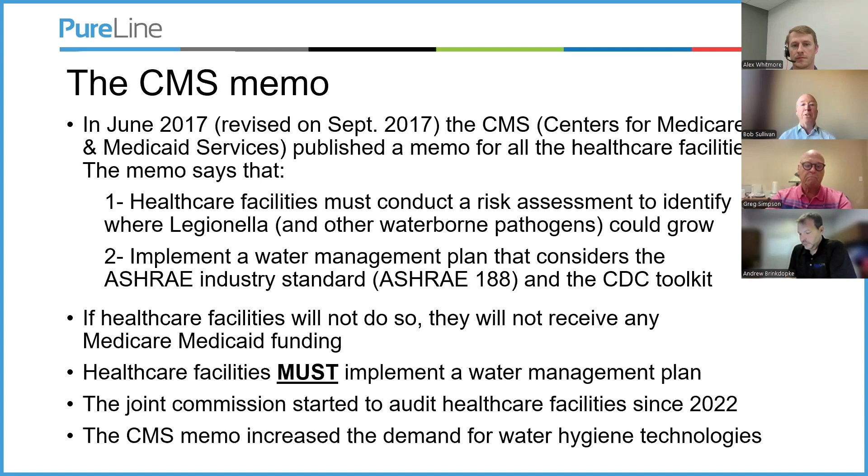So let's talk about the supplemental disinfection technologies. What's available to you and what are we going to address today? So there's really three that are only EPA listed disinfectants for potable water.

And please note that we're kind of focusing on that EPA listed disinfectants. You have chlorine, you have chlorine dioxide, and you have monochloramines. We're going to spend a lot of our time talking about chlorine dioxide and monochloramines, not so much chlorine. Your water, most of you on here, probably get water that is chlorinated from the city. Okay, it comes to you that way. We're also very aware that even though it comes to you this way, that still doesn't protect you against Legionella. So that's why the focus is going to be on the chlorine dioxide and monochloramines.

There are some other technologies, okay? These are non-EPA listed disinfectants. That's copper silver, some of you may be using it, ozone, and then there's a mixed oxidant system out there, which is, in my mind, really a sodium hypochlorite generator. So you're putting bleach in the system. We're not going to spend a lot of time on these. If you have questions, we certainly have information. But they are non-EPA listed disinfectants for potable water.

And so we really wanted to focus on, kind of the game here. So monochloramine chemistry is usually produced on site as needed. There's no storage or highly concentrated monochloramine solution. Precursors are, as you might be aware, sodium hypochlorite and ammonium chloride or sulfate. And it's important to maintain this ratio.

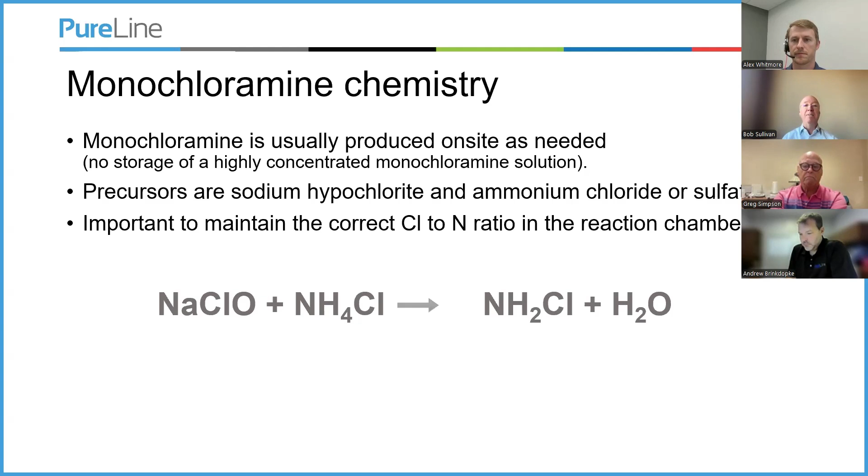What is chlorine dioxide? It's a selective oxidant. It's kind of this yellow-green liquid ultimately. And when I say yellow-green liquid, that's probably from your perspective.

From the chemistry of this product, it's really a dissolved gas. So imagine that I just leave a cup of chlorine dioxide on my desk. That gas, it'll be liquid, it'll be that green yellow initially, but that gas will slowly try to escape. As it escapes, the yellow green will reduce in its color. And so what I'm trying to identify is just the basics of it. It is one chlorine atom and two oxygen atoms.

If you get down to looking at the little symbols off to the side here, again, dilute, liquid, aqueous, and gaseous solution. It's easier for me to think about it as a dissolved gas.

It's used in a wide variety of applications. The biggest one in the country is it makes sure that your paper is white. But more importantly, to what we do at PureLine, it is used in a variety of industries such as water treatment, food safety. A lot of food plants around the country depend on it to clean the water, so they can make anything from yogurt to cheese, etc. The oil and gas guys use it to clean up the water that has to go down an oil well.

And healthcare. We've been in healthcare for 30 years doing this. So it's been around a long time.

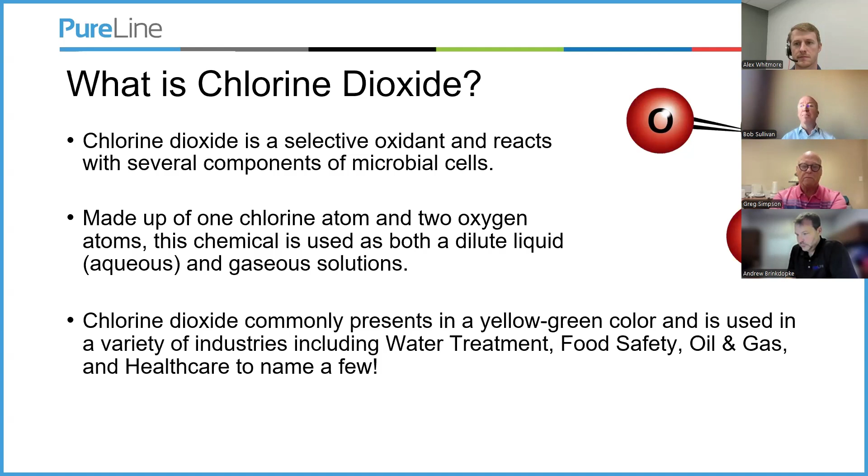So our background, this is a chart. It kind of gets into some of the strength of chlorine dioxide and what it can do. The table that you see that talks about oxidation strength compares different types of oxidants to chlorine dioxide. And what I want you to take away is this: chlorine dioxide has, compared to the others, a lower oxidation strength. And why is that important?

Because it prevents the corrosion. You get into some of these and you're going to get higher corrosion. They're not good for your pipes. Forget about the safety of potable water, but I'm just comparing these oxidants.

But it is a very strong, effective, selective oxidant. What does selective mean? That means that it really wants to go after things it wants to destroy. If you put chlorine or sodium hypo into your line, it's going to want to chlorinate everything. Chlorine dioxide is not going to do that. It's hungry for things that are causing you issues, the biofilms, the bacterias, etc.

The primary reaction is a free radical reaction and is independent of pH. Now, not so important for hospitals, but we have other applications where the pH goes high. If the pH goes high, you have to use more and more chlorine, sodium hypo, any of the chloramine products, etc. This independence on pH becomes a very, very big advantage for chlorine dioxide.

I've already discussed that it's a dissolved gas, and it's probably the best thing in this whole list that we can talk about for penetrating biofilms. It is less corrosive, I pointed that out in the oxidation strength. And the final product, which is what the EPA and your FDA guys like, eventually returns to just chloride and oxygen, which means chlorine dioxide can be registered as organic.

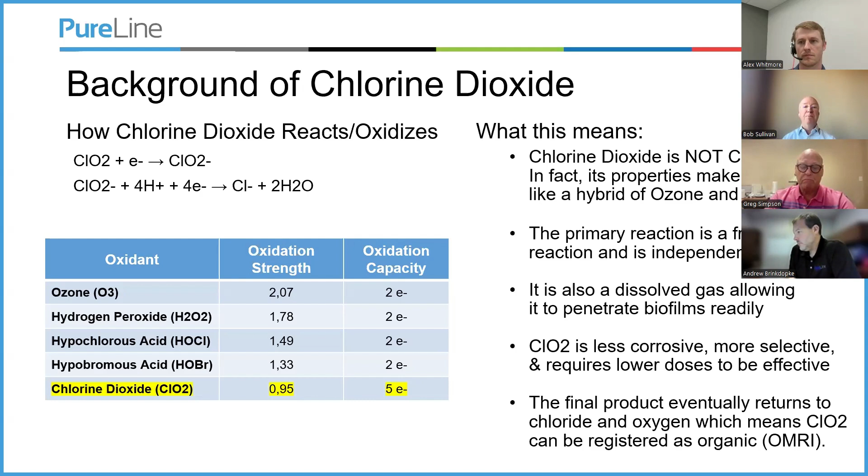As Alex mentioned, a couple of months ago we did a paper at AWT, Association of Water Technologies, and the paper compared chlorine dioxide and monochloramine and their effectiveness in a large number of categories. This was a review article, and it's what the science says, it's what the literature says about these. It wasn't opinion, it wasn't my opinion anyway, it was the opinion of a lot of other writers.

The first category was the relative speed and efficacy of disinfection. Chlorine dioxide kills, inactivates bacteria very rapidly, second only to ozone in terms of its kinetics of disinfection, compared to monochloramine, which is much, much slower.

One of the references cited in the article was these people compared monochloramine's action with that of non-oxidizing biocides in terms of how long it took to kill things. So monochloramine acts like a bacterial poison. Chlorine dioxide acts like something that causes a heart attack. That's the difference in the way of thinking of the speed and efficacy. The second area was biofilm penetration and removal.

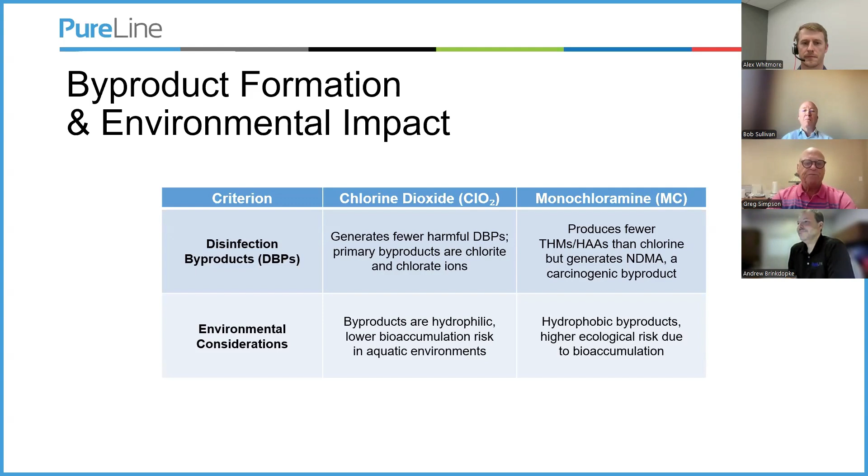In terms of corrosion, a lot of work has been done with respect to corrosion and chlorine dioxide, and it certainly depends on how the chlorine dioxide is made. We did a paper not too long ago about work in the oil patch, where we used fairly high levels of chlorine dioxide compared to what's used in potable water. In every system we treated, with the exception of just one or two, and even those were within experimental error since the corrosion was low to begin with so it didn't matter, the corrosion rate went down. That is, the natural corrosivity of the water was such that when you fed chlorine dioxide, the corrosion rate after treatment was lower than it was before treatment. Of course, that's in the oil patch.

Chlorine dioxide is aggressive to certain plastics, so we are very careful about our material choices when making a chlorine dioxide generator, where you have thousands of parts per million of chlorine dioxide. But in terms of its corrosivity at the use concentrations applied in potable water, it will not be corrosive. Monochloramine is also pretty good in this regard, but if you've ever had a drinking water system that used monochloramine, your toilet flaps don't last very long, because monochloramine degrades them a lot faster than chlorine does.

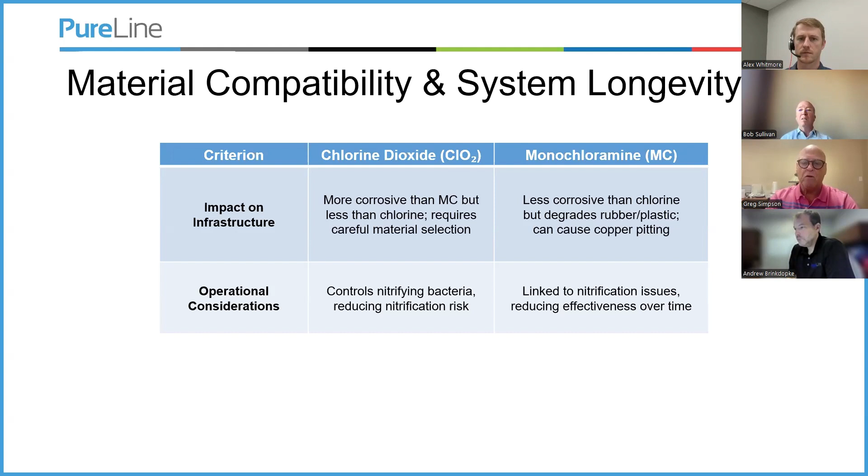Greg is obviously incredibly versed in the chemistry and the science behind chlorine dioxide. My forte is in how to make systems and design applications for real world use, to make them safe, reliable, controllable, those types of things.

We participate in all sorts of water applications throughout the country, and chlorine dioxide is used anywhere from municipal water, to be the primary treatment of the water before it makes it to the hospitals, secondary treatment of that water within hospitals and food plants and nursing homes to keep those water systems clean, well water treatments for metals removal, as well as treatment and disinfection of E. coli and other waterborne pathogens.

Wastewater treatment, cooling towers, and we do this at hospitals and nursing homes as well, cooling towers to prevent biofilm accumulation, which will degrade its effectiveness, as well as control Legionella, which, if you've seen in the papers, cooling towers, when they become infected with that, can then spread that Legionella via water droplets to those that are near the system and cause infection that way, as well as used in CIPs and wash waters.

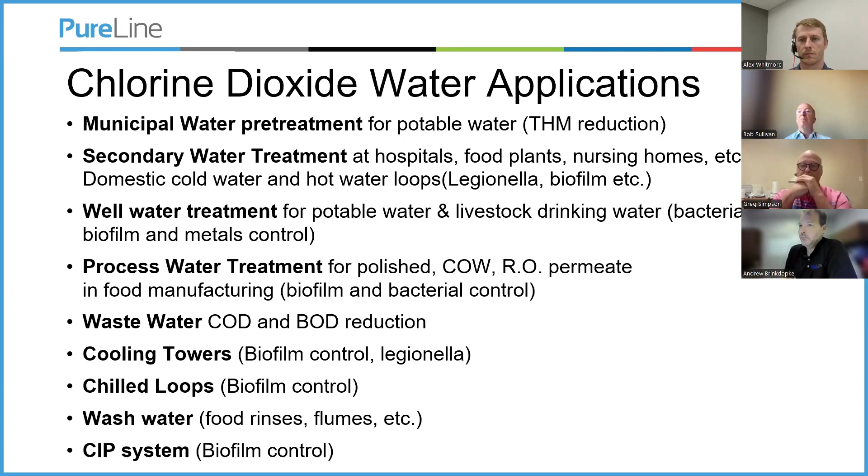But we're going to primarily talk about secondary water treatment here. It's called water treatment, but the purpose of secondary water treatment is to keep treatment in the water to clean the systems themselves, because it's the system that is accumulating biomass or pathogens in it. Though the water that came to it is treated, it's not sterile—there are still organisms in that water, and there are methods for infection of the system via contamination and other sources. So eventually, almost any water system, unless it has a secondary water treatment to maintain levels of chemicals and other processes to keep those lines flushed and clean, will accumulate biomaterial or pathogens in it at some point.

Next slide, please, Alex. So why are we talking about Legionella so much? Well, Legionella obviously causes Legionnaire's disease, which is very awful, and those people who are in hospitals are very susceptible to it.

It also grows and lives within biofilms. So if your system can harbor biofilm, Legionella is a naturally occurring waterborne pathogen that's in almost all water samples at very low levels. But if it's allowed to accumulate and grow in biofilms, that's where it becomes a problem. And if it's in a site where you have immunocompromised or very old or very young that are exposed to that water, it can lead to disease.

So remediating that biofilm is the primary concern. If you can remove the biofilm, the Legionella won't have anywhere to harbor and grow and accumulate. Biofilms are anywhere from something where you can open a pipe and literally see it, and there's slime or greasy substances, to just a slippery feeling on the inside of a pipe—not visible to the naked eye, but it's there, and bacteria is living in that.

That's where, when we talk about ozone and chlorine dioxide as being the only two dissolved gases listed as disinfectants, they penetrate through those walls readily, because just like oxygen goes in and out of cell walls, so too do these chemicals, and they kill it from the inside out, all the way down to the wall. Chlorine dioxide is a little better in that it's not reacting with the metals of the pipe wall as extensively as ozone, and has a much larger half-life.

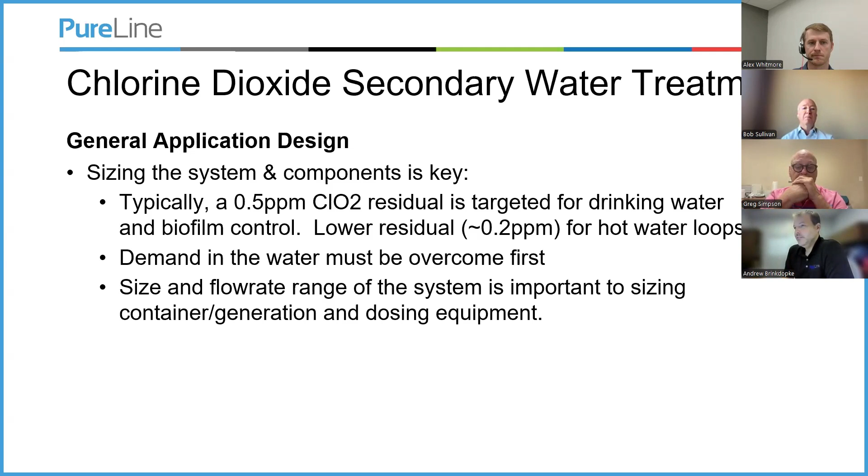So those tools are available, but the basic calculation is: we look at total daily water usage, which you can calculate just by looking at the water bill—take the monthly usage and divide by 30 to get how much water you're using per day—multiplying it by the density of water, dividing out by 1 million, and that's the pounds of chlorine dioxide needed for a 1 part per million dose.

As we talked about, 0.5 part per million is typically a safe estimate. 1 part per million has some conservativeness built in, in case you need to be able to shock treat. But an example calculation: if 50,000 gallons a day is being used, then applying the math, about 0.42 pounds of chlorine dioxide is needed. That's active chlorine dioxide, not pounds of solution or anything like that—that's the actual pounds of the molecule you need.

But what's as important, and more important, in these facilities where typically we're treating the domestic cold water, is that it's on-the-fly treatment. If that water is going by one time, that's our only chance to treat it—we need to treat it based on flow. In the mornings and evenings, the flow rates are very high because showers and bathrooms are being used, and overnight there's almost no water usage in a lot of facilities.

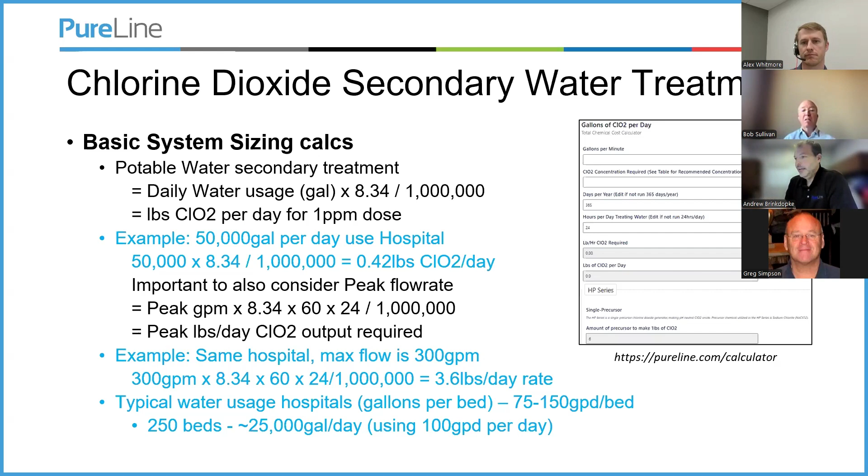So again, another easy tool for sizing. If you've got 250 beds or so, using 100 gallons per day as the average per room, that's 25,000 gallons a day. You can do your chlorine dioxide calculations based on that.

Dosing control, as I mentioned before, what we're looking for when treating domestic cold water is the flow, because that's the instantaneous read. We can secondarily control to the actual amount of chlorine dioxide in the water because we have analyzers that can measure that. We call that trim. But because the water flow is changing so drastically and so fast, the only way to respond fast enough is to respond to the flow, proportionally dose the water, and then adjust based on the residual if you want.

In our applications, probably 50% do it solely on flow pacing, using the flow meter, and 50% use flow pacing with a residual analyzer that turns the pump up or down slightly based on how close they are to the target residual. Say they want to run 0.3 and it's running at 0.25 — it'll increase the pump speed slightly based on the flow to get it close to that dose point.

Hot water loops are a totally different system. We consider that a closed loop. Water is added as necessary as people use water out of the loop, but that water is just circulating in that loop until somebody uses it. So we can't treat based on flow there — you have to use a residual analyzer.

And here's an advantage over something like monochloramine: monochloramine is only dosed into domestic cold water, and potentially a secondary point where they treat the water going into the hot water loop, but they can't actually treat the hot water loop itself because they're not measuring the levels of monochloramine, and you can overdose the system. With hot water loops, we monitor that level continuously, and it only doses as needed, as new water is used, to prevent that.

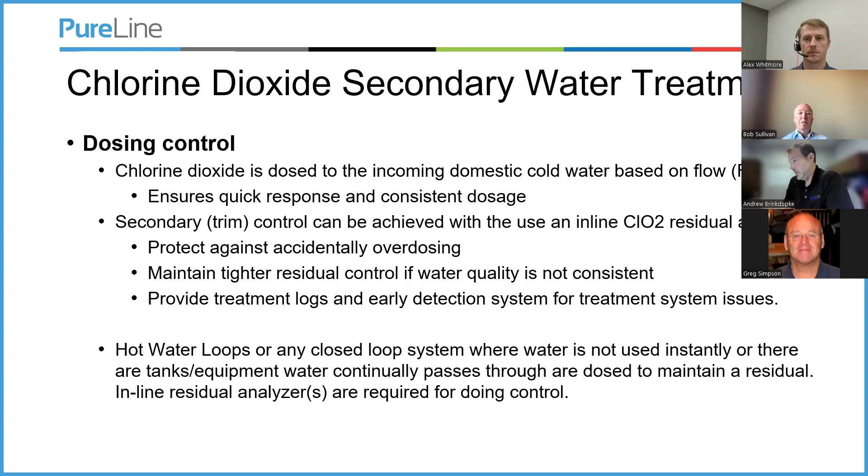So as I mentioned, there's sizing calculators for how much chlorine dioxide you really need, and that comes down to figuring out, hey, can I just buy pre-made chlorine dioxide solution? There are a few manufacturers of this, and we manufacture a fantastic product called Pure 3000, which is an organic certified 3000 ppm solution of chlorine dioxide. It's sold in anything from 1 gallon containers to 265 gallon totes, and a 55 gallon drum can treat about 330,000 gallons of water if you're able to maintain good residuals with a 0.5 ppm dose.

So doing that math, if you've got a hospital and the calculations show you're using 20 or 30,000 gallons a day, then a single drum of chemical is going to last up to 2 weeks. At that point, from a cost perspective, it's much cheaper to just buy pre-made chemical and have the right flow meters or sensors with very high-end, accurate, reliable dosing pumps that deliver that solution into the water. So pairing that together is just as good as having a generator.

Our HP generator makes the purest form of chlorine dioxide you can make. It's the same technology used to make our Pure 3000. That technology makes chlorine dioxide from sodium chlorite and then strips just the gaseous chlorine dioxide and reabsorbs it into a clean water stream, so the only product in there is water and chlorine dioxide. No byproducts from the generation, no acids, no caustics — it's pH neutral. From that standpoint, it's the least corrosive and the most effective in terms of its chlorine dioxide.

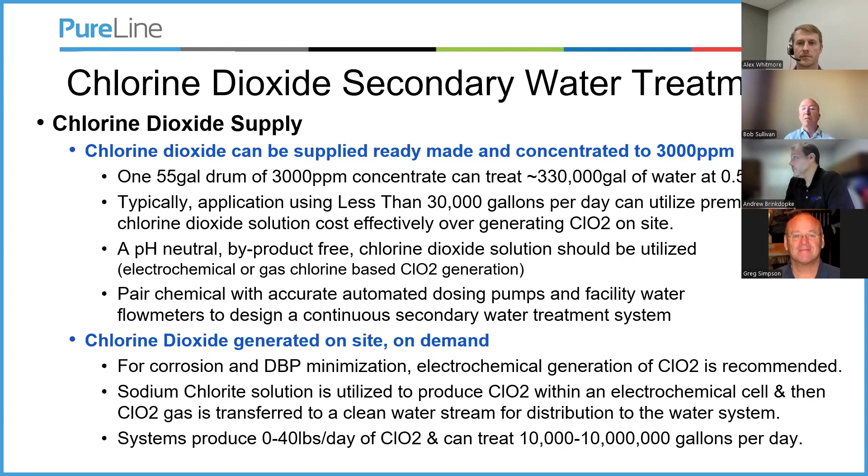So this just shows diagrams, stuff that we'll help put together. This is an example where a hospital was being built. They shared the drawings, and we marked them up to show where to install the general equipment. This is a Pure 3000 application with 2 injection points for hot water loops. There's a sample cooler to cool off the water, run it through our PCA boards, which is our chlorine dioxide analyzer, and then that analyzer feeds the information back to the skid with the chlorine dioxide, with the Pure 3000 dosing pumps to dose water into those domestic loops as necessary.

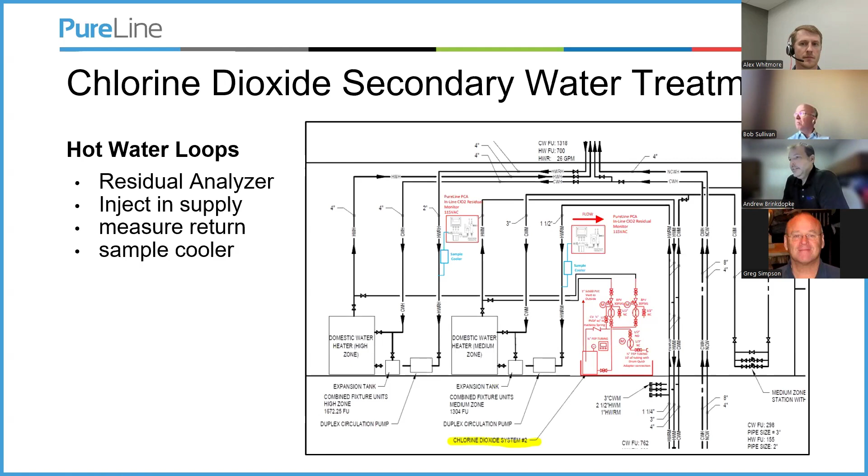Another example, something that comes with the generator, a little easier view of it, is the skids have injection pumps, reservoirs for holding chlorine dioxide, and can inject into up to 3 injection points for most systems. The HP generators are up to 6 standard. We can do more, but at that point it's fairly custom engineering - not a problem, we do that as well.

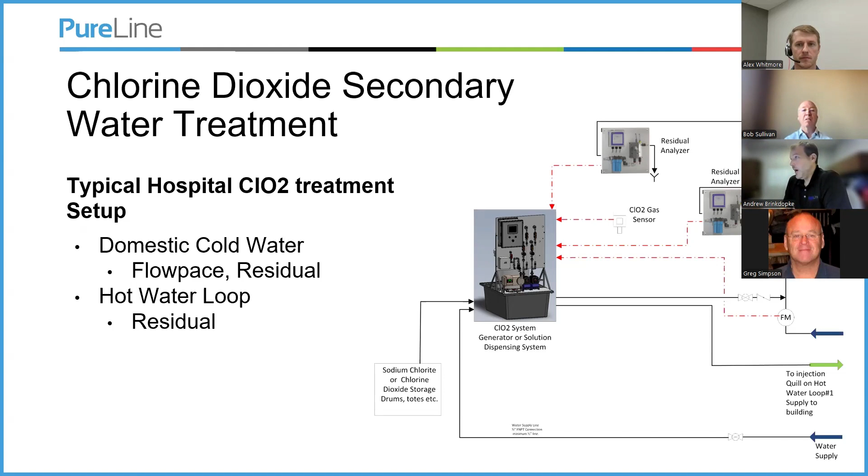I'd say the largest application at a hospital that we have has 4 injection points - a cooling tower, 2 hot water loops, and a domestic cold water treatment, which we do all out of one system. This installation is at a new hospital, one of 2 installations they actually have there. There's enough elevation change - I believe this is a 14-story hospital - so this is located on one of the lower floors, I believe floor 3, and it has the HP generator.

This is the electrochemical chlorine dioxide generation. The blue drum you see there is the sodium chlorite solution. That drum will last that hospital - we change it every 3.5 months, so very infrequent change outs of the chemical. It's very cost effective to make chlorine dioxide with the generator once you have it.

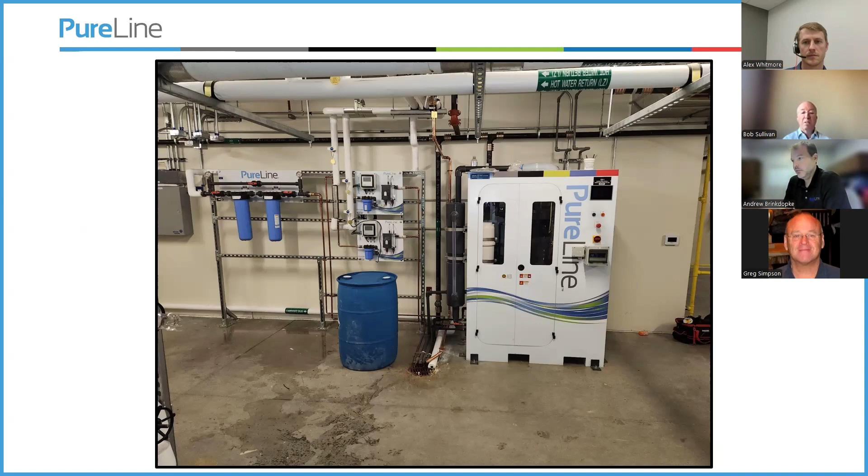That chlorine dioxide generator feeds 2 points here - one is a hot water loop and one is their domestic cold water. That's why you see 2 PCA boards measuring chlorine dioxide. The samples come back, the hot water pump turns on and off based on the reading, and the cold water pump runs primarily based on the flow signal they're providing, with controls to turn it up or down or off if any error is detected or they get out of range with their treatment.

This is that same hospital up on the 7th floor, where they have 2 small hot water loops. They didn't need a generator anymore, but they couldn't get the lines from the generator on the lower floor all the way up to this floor. So this is just a remote system using Pure 3000. With this one, the hot water loops usage levels are so low that they're using a drum of Pure 3000 about every month and a half, so it definitely did not warrant buying a generator.

So this system has all the same capabilities, it just can't generate its own chlorine dioxide. It takes the readings from the PCAs, controls the pump speeds, has digital reporting, remote communication, all of that.

This one has a built-in reservoir tank, so the drum of Pure 3000, the yellow drum you see there, is delivered. We have special fittings for our drums to minimize any exposure to the chemical. A special fitting called a drum quick connects to the top of the drum, and there's a built-in dip tube already in the drum that can fill the onboard tank, allowing the dosing pumps to continuously deliver chlorine dioxide. There's no priming or having to swap containers on the fly and no loss of treatment.

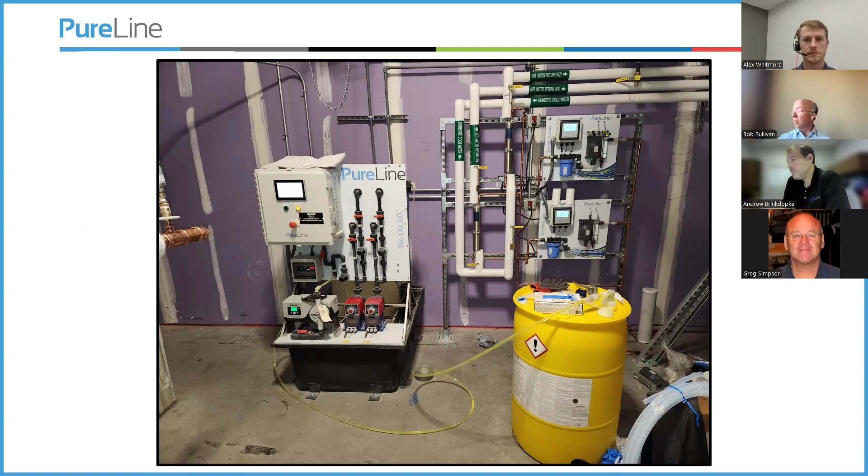Pure 3000 is 99.5% pure chlorine dioxide. What that means is that for the chlorine species in the water, different applications that make chlorine dioxide or chlorine will have chlorine dioxide, but they'll also have chlorates and chlorites and chlorine and anything else, or maybe acids if acid is used. Because of the stripping technology we use, 99.5% of the species is chlorine dioxide. The remainder is a very small bit of chlorite, because dissolving chlorine dioxide in water will produce a slight amount of chlorite.

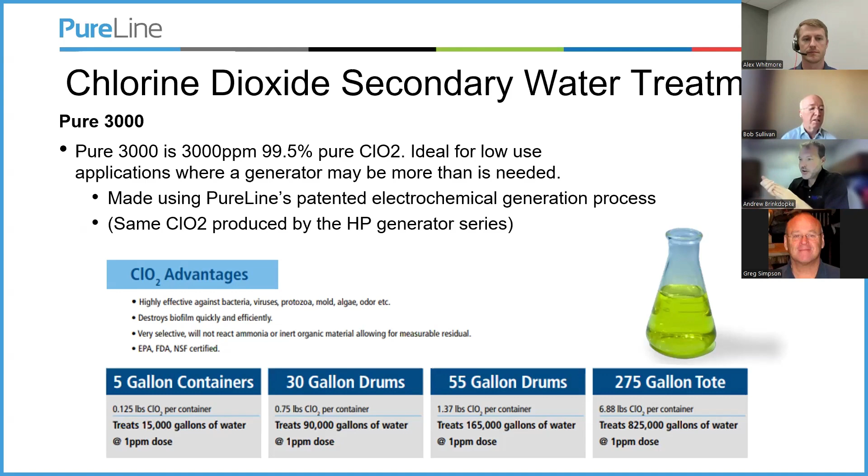Typically a non-detectable level of chlorine in the water. It's available in all kinds of container sizes. Below you'll see our primary containers and how much water they generally treat. So the tote of Pure 3000 can treat 800,000 gallons.

This is the HP generator, as we saw in that other picture. It's NSF ANSI 61 certified, which is certification for use on drinking water systems. In terms of getting it through your state regulations, that's usually one of the things they're looking for. All the chemicals used, the Pure 3000 that's produced, as well as the sodium chlorite solution we provide for the generator, is NSF ANSI 60 rated for drinking water, which again helps meet those needs.

Our pumps on board are built with 1,000-to-1 turn down ratios. That basically allows us to accurately dose water from almost zero flow to the maximum flow rate of the facility without any spikes or dips in the residuals that could cause problems. As mentioned, three dosing pumps can be built in. Typically, the HP generator can be expanded all the way up to 6 without any significant engineering.

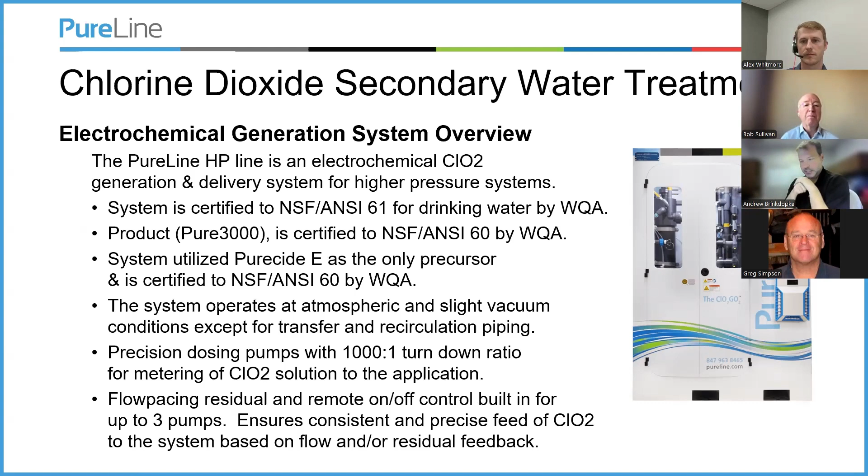There's no one size fits all, right? Not every place needs a generator. Not every place needs Pure 3000. Not every facility needs chlorine dioxide. You're developing a water treatment plan, identifying if you have a risk and what the right solution for it is.

Secondary disinfection is good to eliminate problems. It's great for control, but the chemicals used, chlorine dioxide or a generator, where you're dosing it, those are all important. But how to get that treatment everywhere throughout the facility and make it effective is just as important. And no one likes hearing that, but that means implementing the right plan so your water systems are cycled and flushed on a regular basis.

Dead legs happen when there's construction changes and piping systems in the facility that are almost never used - everything that was connected to it is no longer in use, so the pipe just sits there with dead water. We call those dead legs. That's where biofilm, bacteria, and pathogens will live and grow. Even if we're treating the rest of the system, no treatment is getting into those dead legs, and they will eventually accumulate enough that when they start to slough off and recontaminate the water system, it may be too much at periodic times for the treatment level to adequately kill, giving you those periodic spikes in positives at your point of use.

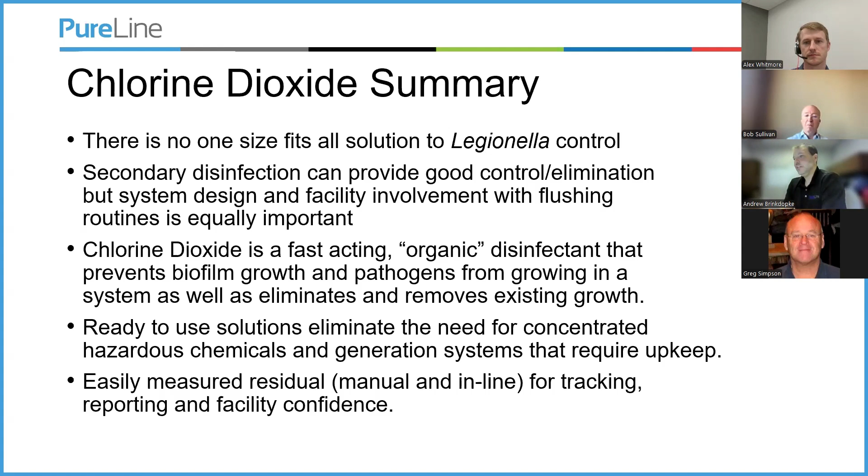Flushing those lines, unoccupied rooms, low use areas, dead legs - I know I talked about this on the previous slide. This is the fundamentals of a water treatment plan, it's where you start. And testing - the testing plan, focusing on testing in those areas.

Hitting a softball is really easy, but what we want to know is are those hard to get places being treated well. The chlorine could be doing great in lines where water is flowing all the time, nonstop, used every day - you never get a positive there. But you go to the janitor closet on the 7th floor where they fill the mop buckets, and you test out of there, and it's almost always positive. That's because that water is only being used infrequently. But that's where you should be testing, because if you can get that to zeros, your high use points are only going to be better.